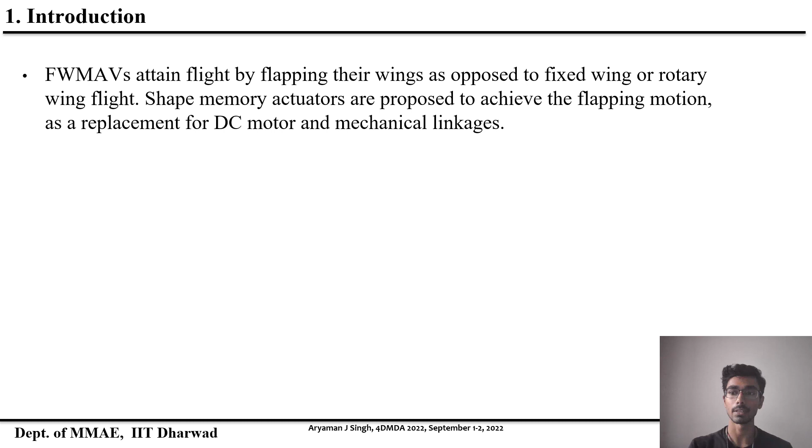SMAs offer great potential based on the inherently high work density, which is roughly 25 times greater than the work densities of standard electrical motors, which makes them a suitable replacement. They mimic natural birds, so they pose an excellent resource for aerial reconnaissance, wildlife survey, and navigation through humanly inaccessible regions.

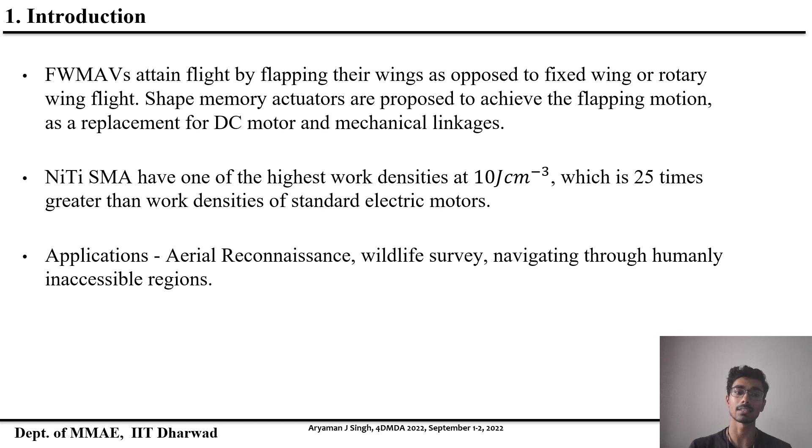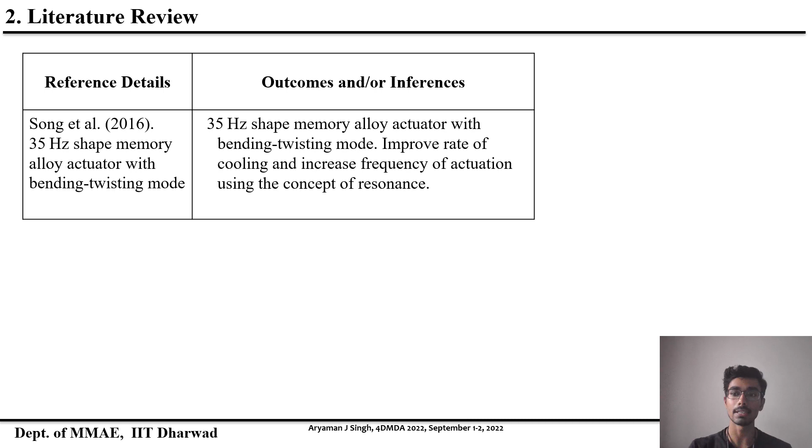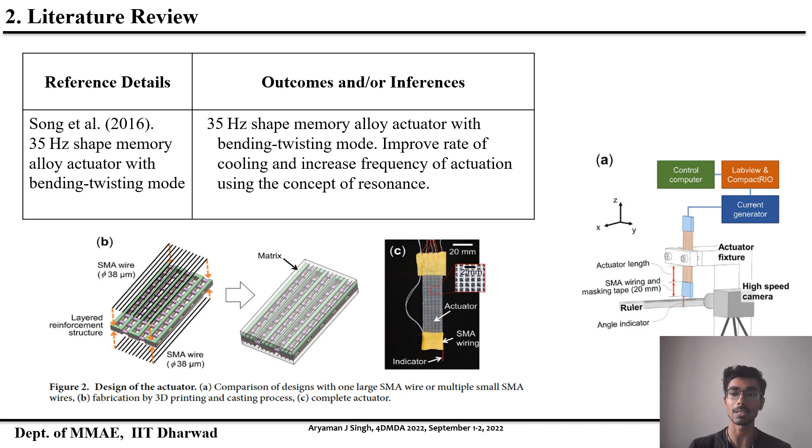Moving on, some of the literature which has proved helpful in our research is mentioned here. In this paper, the authors utilized the natural frequency of the actuator to attain maximum stroke angle out of it. They also attained up to 35 Hz of flapping frequency with SMA wires of 38 micron diameter. They used two sets of wires for two-way actuation to produce the flapping motion. They used a PDMS matrix, which is a soft and flexible material, to keep the wires in place and prevent environmental damage.

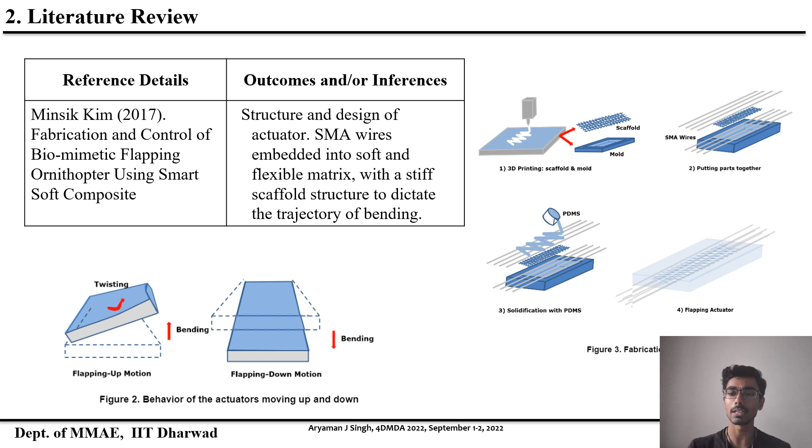Another paper shown here has worked on a similar concept. Their actuator is designed such that it also twists slightly during the upstroke to produce greater net lift force for the wing attached to it and reduce its drag.

Now moving on to the objectives. The first objective is to design a 4D printed SMA actuator that performs the flapping motion. Then evaluate the performance of the actuator using parameters such as the stroke angle and the time response.

Nitinol is a non-linear material which is comparatively more complex to model than a linear one. However, we have used the Euler-Bernoulli model, applicable for linear materials only, and compared it with a simulation resulting in the elastic range. By applying boundary conditions of zero displacement and zero slope on the fixed end, we have used the Euler-Bernoulli equation to model the 75 mm long and 1 mm thick SMA wire, similar to a cantilever beam.

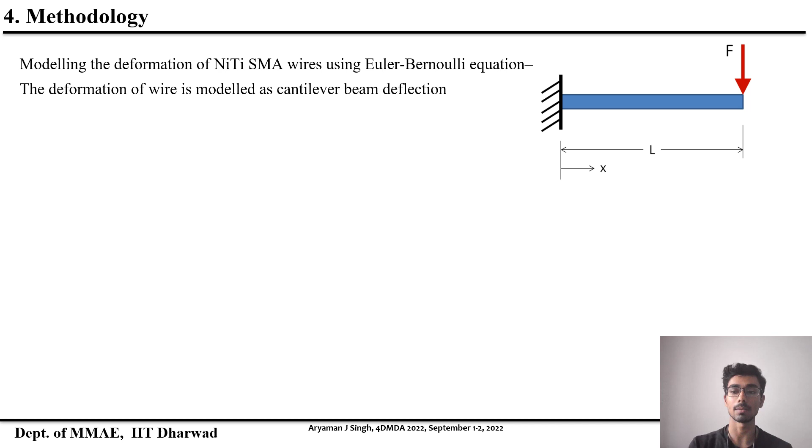As you can see here, after obtaining the relationship between the deflection of the free end with the load applied to it, we have compared its plot with the one we obtained using ANSYS simulation of the same.

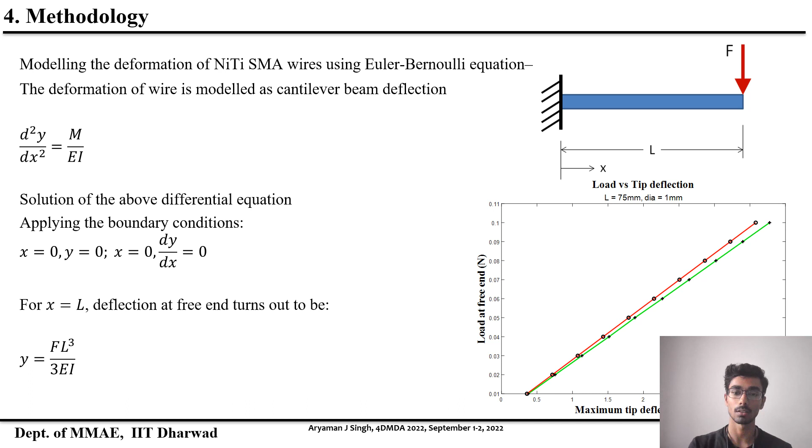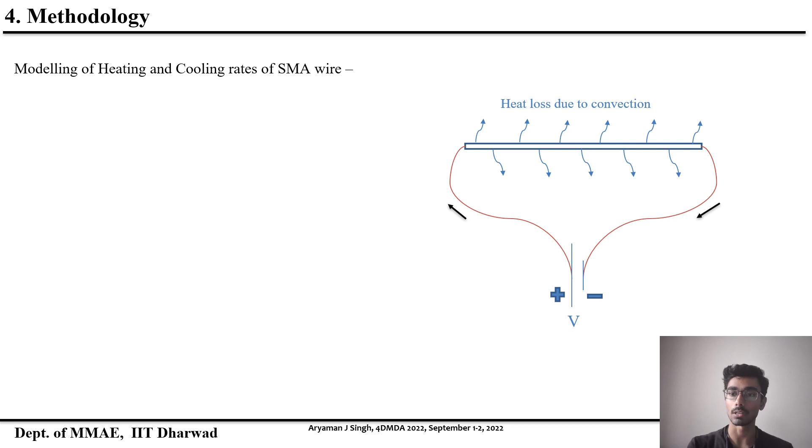One of the critical factors we face with shape memory materials is their heating and cooling rates, as heat is the chosen stimulus. The heat is caused due to Joule heating, which is caused by current passing through a resistor. As we observe, there is a loss of heat due to the convection taking place. Taking all of these into account, the heat transfer equation for the wire is derived from the first law of thermodynamics.

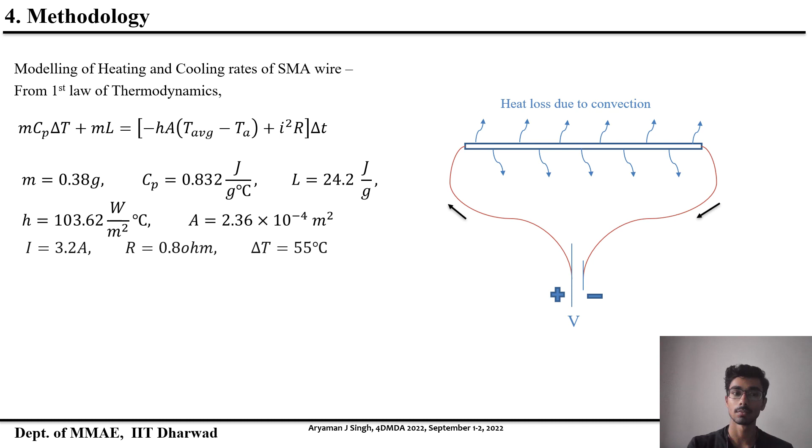These are the parameter values we used to calculate the total time required to heat the SMA wire from ambient temperature to its austenitic finish temperature at 80 degrees Celsius. It is obtained as 3.53 seconds.

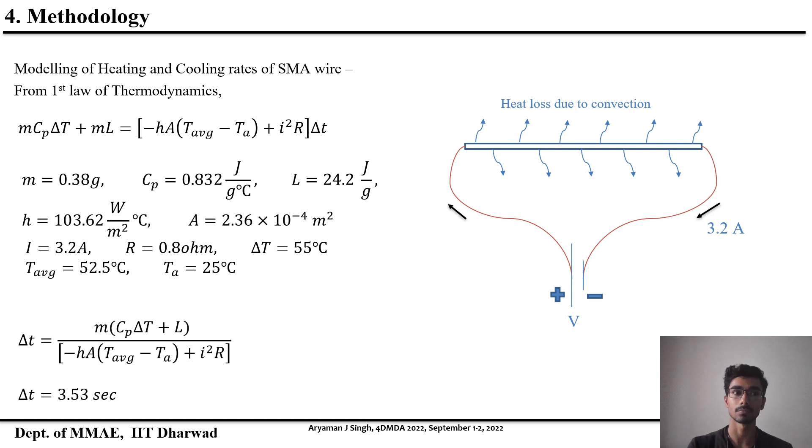For higher net force, the matrix should be soft and flexible so that it doesn't resist the recovery force, and a high quantity of shape memory material will result in high recovery force. So the higher the amount of SMA wires, the more force will be produced.

For high rates of heating and cooling, we propose to use thin SMA wires, and using high electrical power will also increase the joule heating rate.

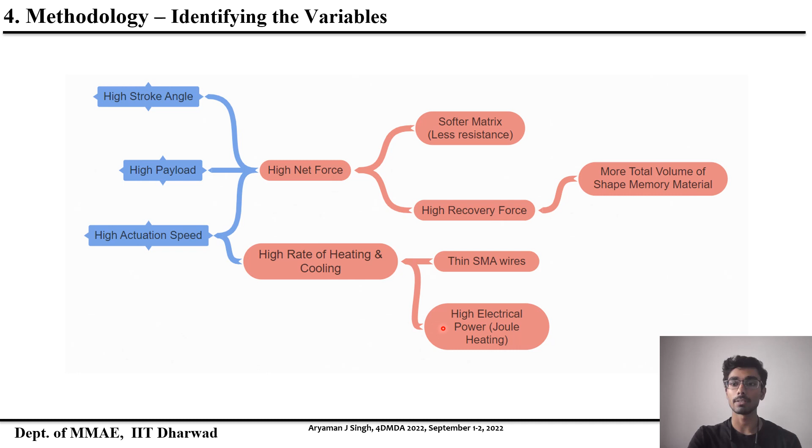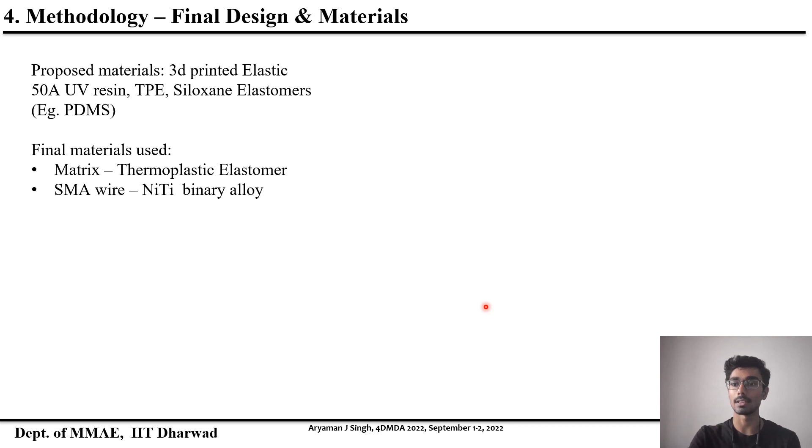As discussed in the previous slide, the matrix should be soft and flexible, for which the proposed materials were 3D printed elastic 50A UV resin, TPE which is thermoplastic elastomer, and siloxane elastomers such as PDMS. The final material used was thermoplastic elastomer because of its ease of 3D printability.

Our aim here was to use 4D printing to develop the actuator instead of creating a mold of siloxane elastomer as a matrix, which was the case in the published literature. The final design of the actuator is shown here with equally spaced SMA wires inserted into the TPE matrix.

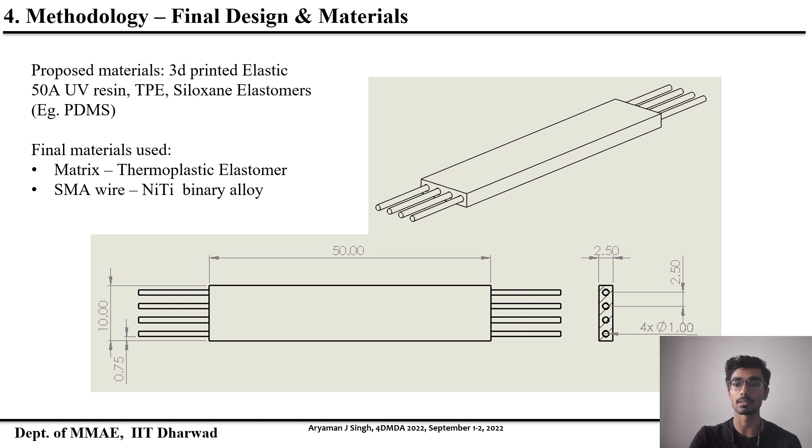We simulated the load versus tip deflection relationship of the actuator prototype in ANSYS and plotted the results as visible.

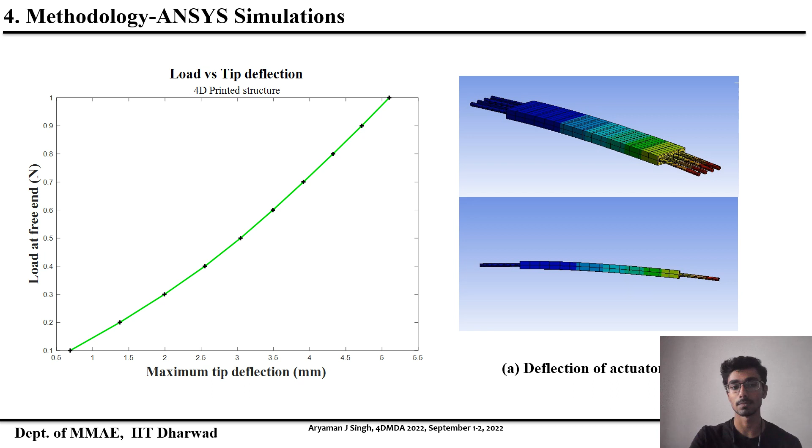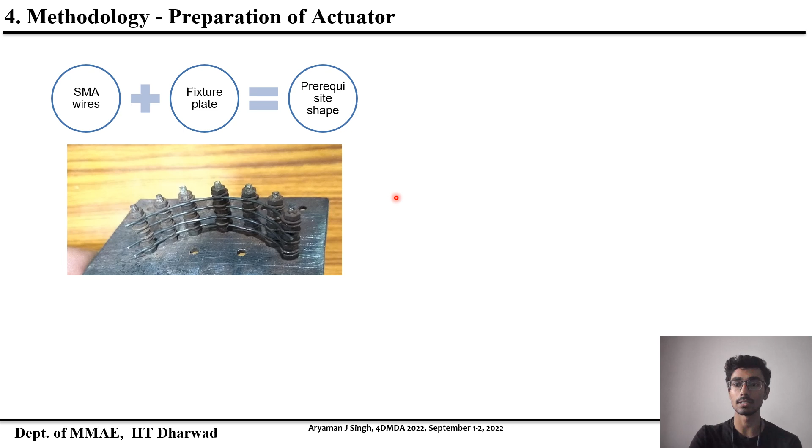To prepare the actuator, we first created the fixture to train the SMA wires. Four such wires of 75 mm length were placed in the fixture as shown, with a bending angle of 70 degrees. Then the fixture was heated up to 540 degrees Celsius in a furnace and immediately quenched afterwards. As the wires trained, they were finally inserted into the TPE matrix.

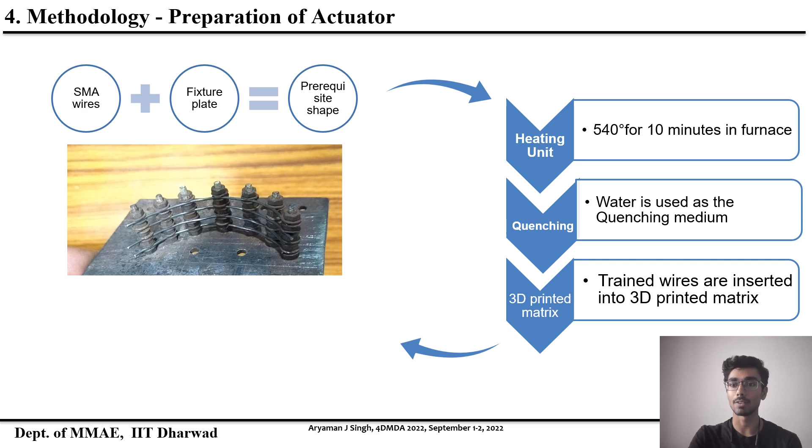The DSLR camera was used to click pictures and record the actuator in action. Clamps were used in the experimental setup to fix the actuator at one end while keeping the other end free to bend. Thermocouple was used to keep track of the temperature of the SMA wire, and finally DC power supply was used for joule heating.

For stroke angle and time response, we use the ImageJ software to measure the bending angle and a video player software to analyze the recorded videos to measure the time response. Here you can see the image of the actuator before actuation and bending due to joule heating afterwards.

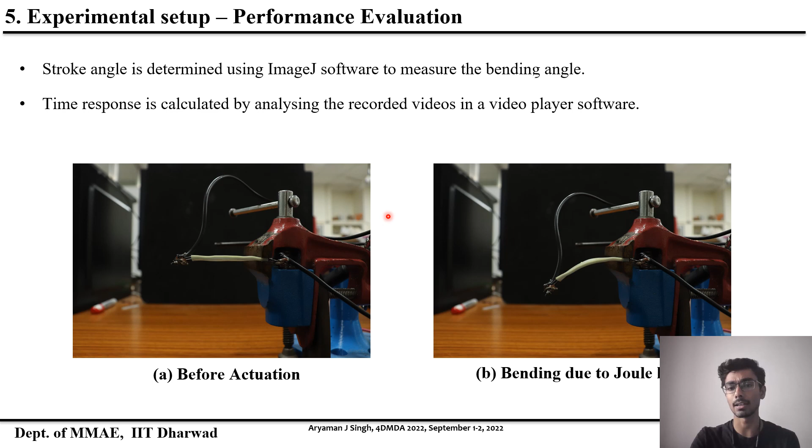Moving on to the results, it was observed for a similar actuator of different dimensions with 2 wires inserted into TPE structure that the matrix reduced the bending angle of bare SMA wires by 26.37 degrees. Tabular data on this is shown.

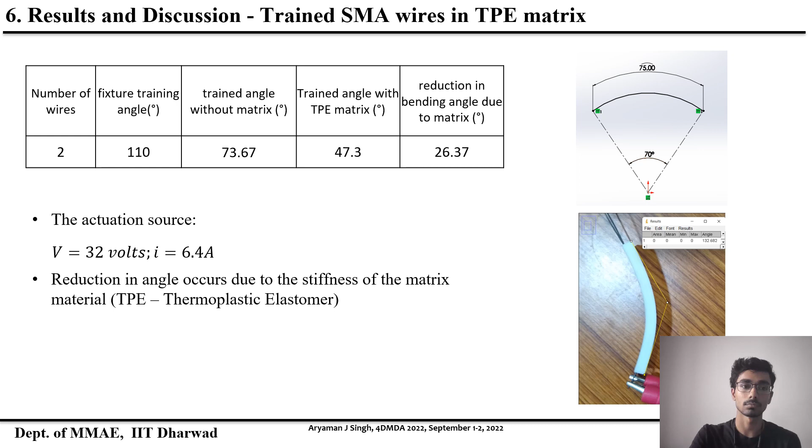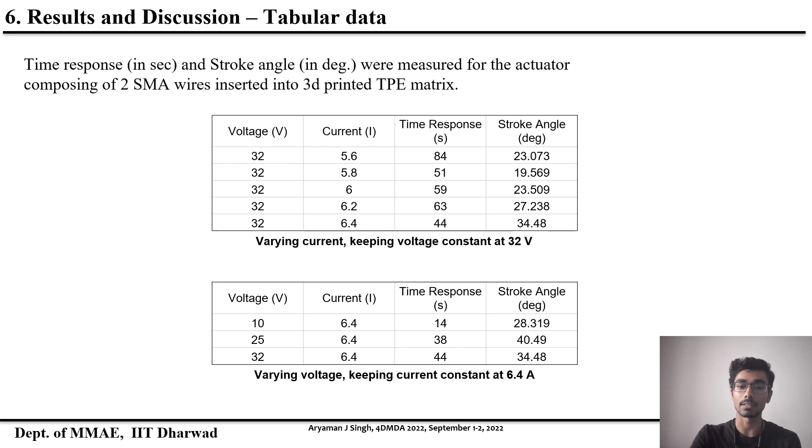This is the data on stroke angle and time response that we measured using the previously shown experimental setup. At first, the current was varied while voltage was kept constant at 32 volts in the voltage power supply unit. Secondly, we varied the voltage while keeping the current constant at 6.4 ampere.

These are the graphs for stroke angle and time response obtained, plotted against the total electrical power.

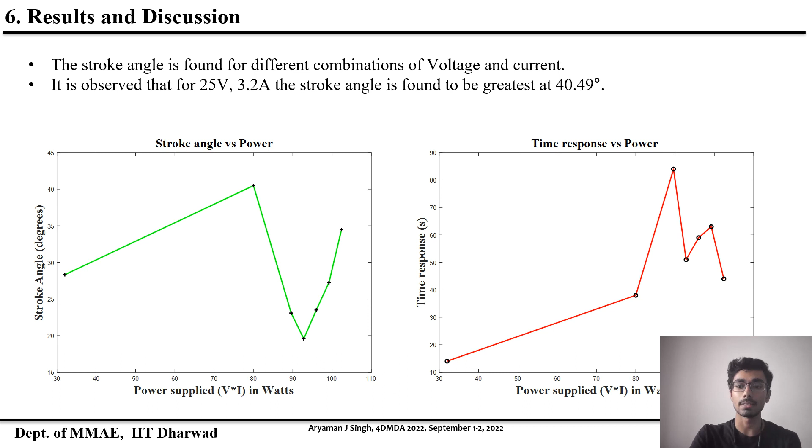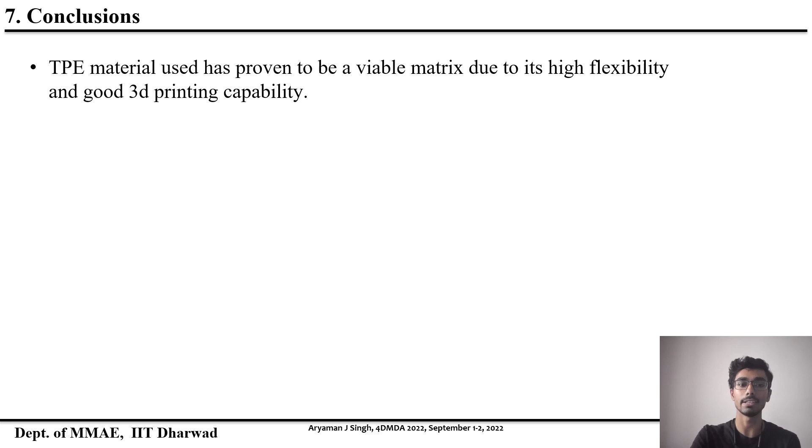To conclude, thermoplastic elastomer material used has proven to be a viable matrix due to its high flexibility and good 3D printing capability. Actuation speed obtained for 1 mm diameter SMA wire is not optimum for high-speed flapping applications.

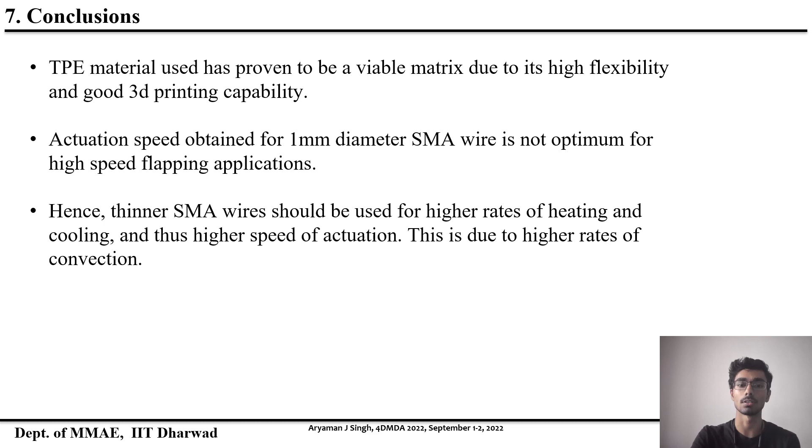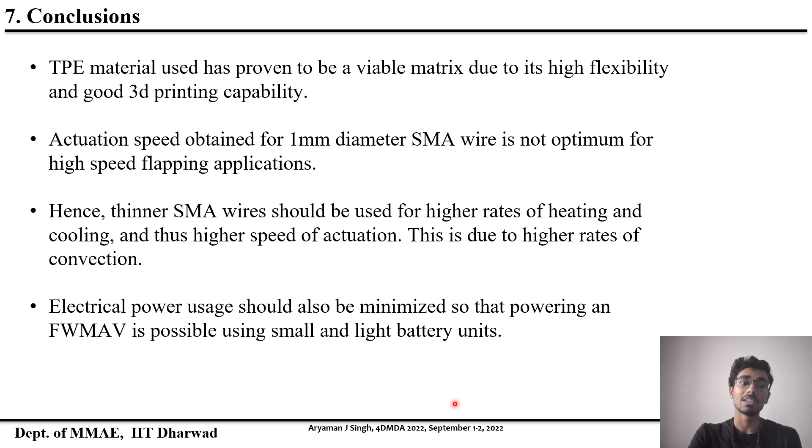Hence, thinner SMA wires should be used for higher rates of heating and cooling and thus higher speed of actuation. This is due to higher rates of convection. Electrical power usage should be minimized so that powering an FWMAV is possible using small and light battery units.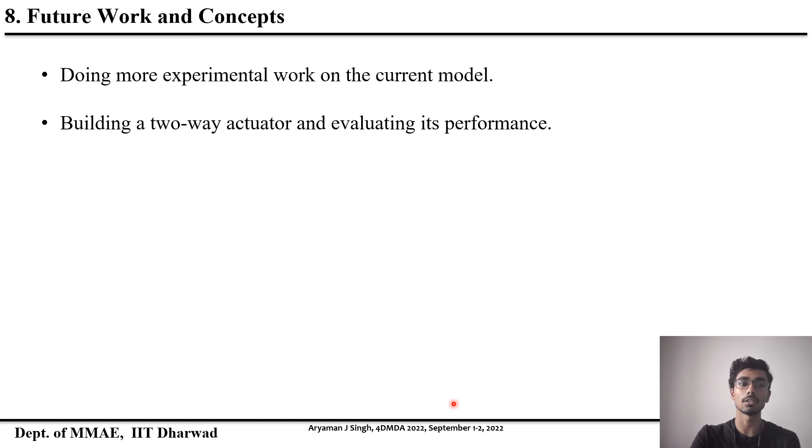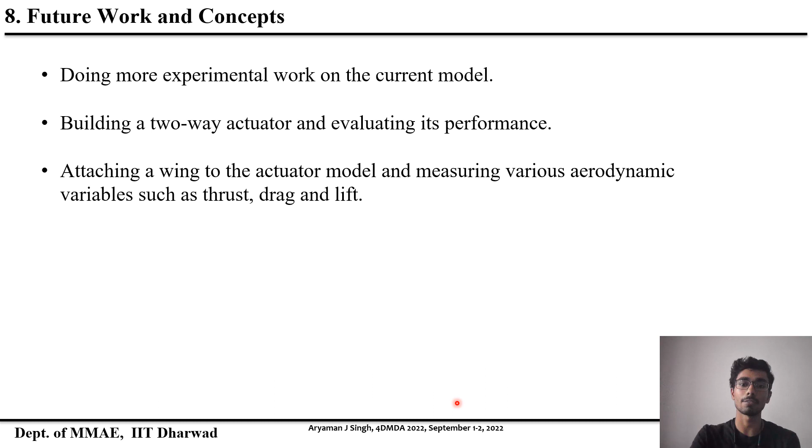Our future work will consist of doing more experimental work on the current model, building a two-way actuator and evaluating its performance so that the flapping motion can be achieved, attaching a wing to the actuator model and measuring various aerodynamic variables such as thrust, drag and lift.